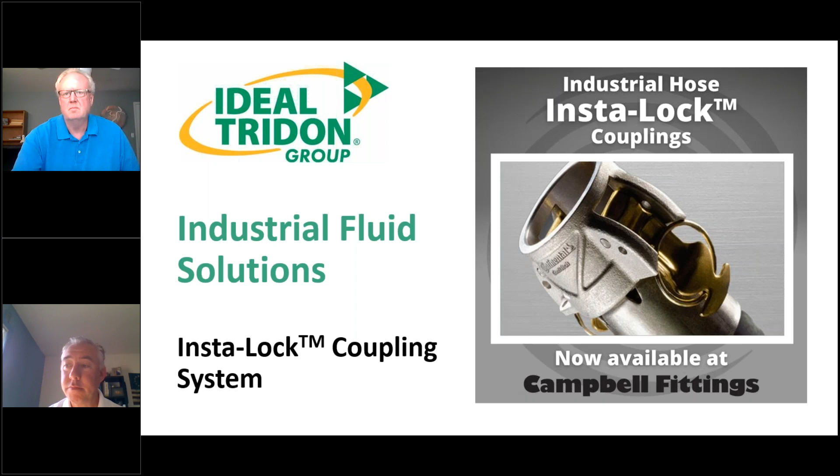We are very excited to continue to push this product out in the marketplace. It is actually an integral part of a hose system. For those of you that might be a little unfamiliar with the terminology of a hose system as opposed to a hose assembly, basically we're talking about parts that are engineered and designed to go together and integrate as part of a system. So a hose assembly simply is 3 parts: fitting or coupling, an attachment, and the hose itself. Campbell Fittings actually controls 2 out of those 3 components, the fitting and coupling, as well as the attachment. The only unknown was the hose, and that's where the crimp specs come into play.

I'm sure many of you, if not all of you on this call, are very familiar with Campbell's Crimpnology and our system of crimping hose in a repeatable fashion. But that is something that we take a lot of pride in, and we'll talk a little bit about those crimp specs and testing as we move forward.

One of the things that we always try to highlight when we're doing some education is we talk about performance as opposed to quality. I think quality is one of those words that's a bit overused, and I think it's easy to just throw it around. Whereas performance actually has quite a bit of weight behind it, because you actually have to prove out that performance. There's a lot of fitting and coupling manufacturers around the world, and I think most of us actually have performance ratings or pressure ratings or whatever you might want to call them. The biggest question becomes, is there anything to back that up?

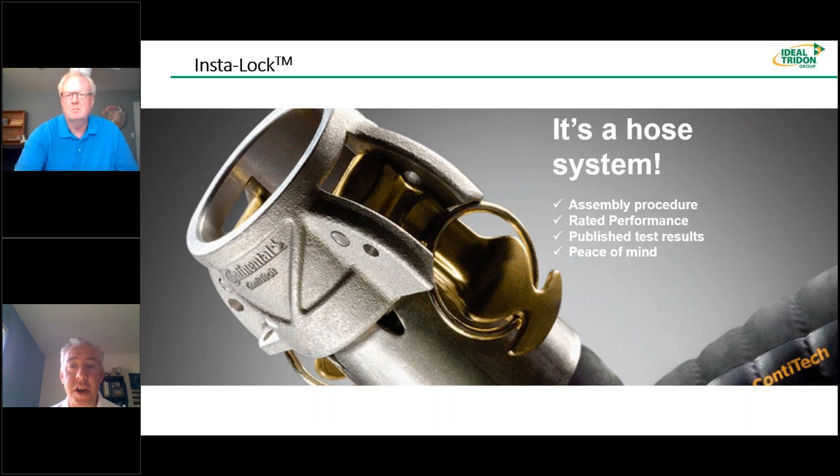So I'm going to introduce Chris Cooper here, who's been with Campbell Fittings for probably close to 10 years now. Chris, I actually didn't even check that one, but seems like it's been 2 or 3 decades from the amount of time we've spent together. Glad to have you with us today. Yeah, it's been over 10 years, and it feels like a couple days.

Not really. Still having fun, right? Yeah, oh yeah, absolutely.

I'm going to talk a little bit about the Insta-Lock and some of the features and the Crimpnology system. Let's start with the system, which is incredibly important. The system we're talking about is the Crimpnology system, the system of proven performance. It has to do with the crimp spec, how you get the crimp spec, and with that crimp spec, you have a rated performance. So it's safe and leak-free, which is what we're all after when putting hoses together.

So there's no more mix and match. Mixing and matching products means taking a fitting from manufacturer A and a ferrule or sleeve from manufacturer B, putting them together, and really one part doesn't know the other part, so you don't know the specifications. Coming up with a crimp spec that gets to a level of performance that's safe and leak-free is very difficult. So, no more mixing and matching.

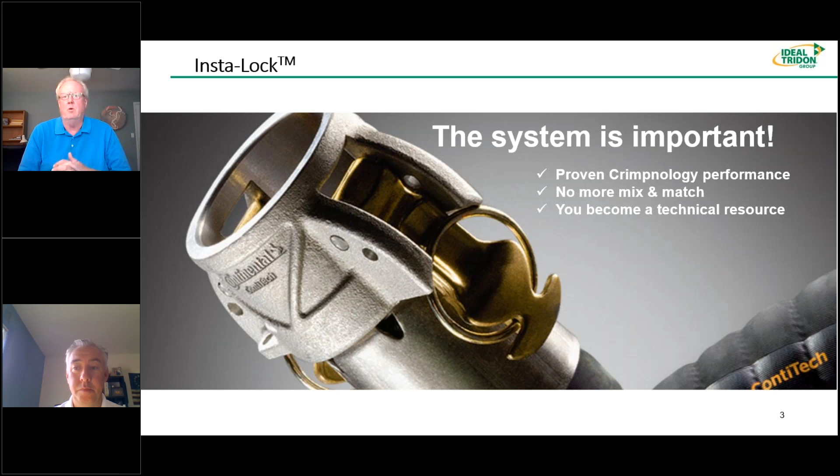You have your ID and OD, but really we're concerned with the hose wall. Why? Well, these industrial hoses are generally hand-built hoses made of layers of material that are wrapped: a tube, then reinforcement, then cover. In the course of manufacturing, the actual hose wall will vary considerably over a 400-foot length on a mandrel, so depending on where you cut it, your hose wall may vary quite a bit. And even though it's perhaps a 2-inch hose, the ID from the manufacturing process could be slightly larger or smaller than exactly 2.0 inches.

So we use the hose wall because we know we want to compress that hose wall between the serrations on the stem and the sleeve or ferrule. Once it's been crimped, we know that compression factor, and then we know the rating. So the procedure is: measure the hose wall, use the chart. It's pretty simple. And then test.

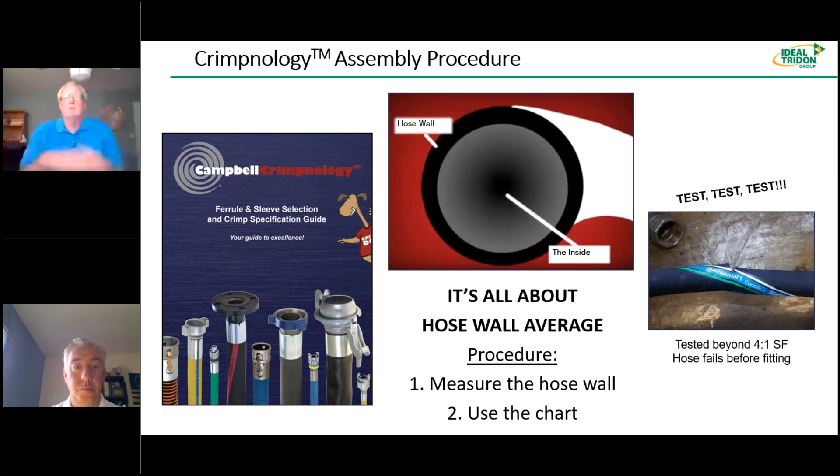All right, I think that's what it says there. I'm getting old, my eyes are going. But anyway, the homework: once you've crimped to that spec, you measure the final OD of the crimp, not on the ridges formed between the dies on the ferrule or sleeve, but on the flat areas.

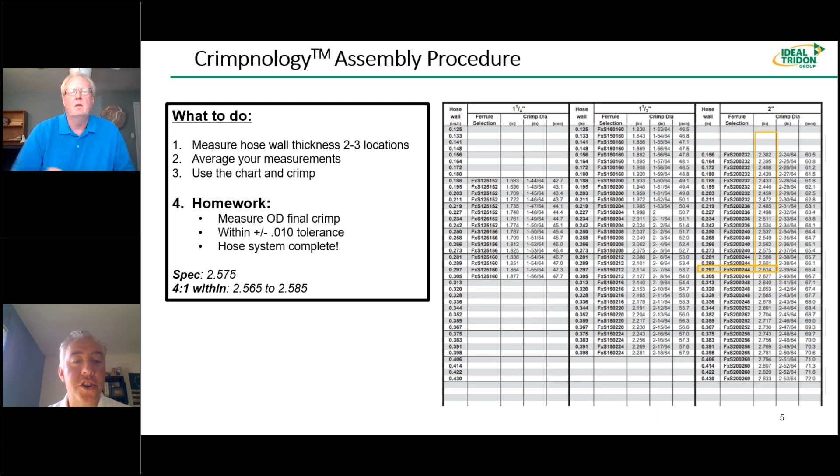Chris, if I could just jump in for a second. Before we do the poll, I think our entire hose industrial distribution world has gone through a lot of changes in the last decade or so. Obviously, we were using a lot of preform clamps to put hose assemblies together. Then there was swaging happening, a little less precise. And finally, we've moved on to the crimp technology, which is much more exacting, as Chris just walked through.

So you had an easier time differentiating yourself when you were crimping hose assemblies and your competitor was just banding them. But now a lot of people are crimping hose assemblies. Not that there's anything wrong with banding, but when you're looking for peace of mind, and something that's going to stay together, a hose system that's going to stand up to performance especially when things go wrong, you do need that crimp for permanent attachment. But based on what Chris just walked through, the specs and the process you use, think about actually using that documentation and that process to sell.

I think a lot of times people forget that the fabrication part of it is truly a science. We've done a lot of the work on the back end, all those calculations and everything like that. But those of you that have either put together hoses or have other people putting hoses together for you on a daily basis, it's not simple. It does take some expertise, and it's easy to learn, but it's also easy to take shortcuts and make mistakes. So that's why you have a process. Think about talking to your customers, especially those critical application ones, about why you have a process, what controls you have in place to follow that process, and really to verify it in the end.

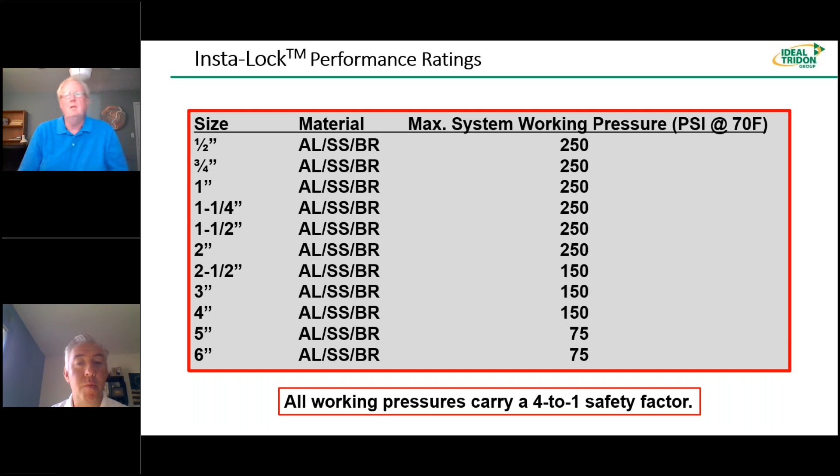Chris, I'm going to jump in one more time, because I think it's worth reiterating, for all the testing that we do and proving out stuff, it is certainly important to realize about that safety factor. One of the critical pieces Chris just mentioned was that the fitting in conjunction with the attachment gives you the pressure rating. A lot of manufacturers out there might just say, well, my 2-inch cam and groove is rated to 250 PSI. Okay, how are you attaching it? There's no mention of that.

So let's be frank. You could use a band clamp, you could use a bolt clamp - well, maybe not a bolt clamp so much for the cam locks - but you could use a sleeve, you could use a ferrule. The reality is each one of those would have a different pressure rating. So you really have to pair the two together in order to get that pressure rating, and that's how we rate everything. Now that we're part of the Ideal Tridon Group and we're actually manufacturing and selling clamps, we do need to be careful on how we assign these pressure ratings. Bands work for specific applications, not necessarily a permanent attachment, but it all depends on what that stamped information is. Do be careful, because not all cam and groove is created equal, and that's basically why we're talking about Insta-Lock here today.

And so let's take a look at the proven performance. And when we say proven performance, what we mean is tested performance. As I mentioned earlier, Campbell tests weekly. We have thousands and thousands of tests on file. Obviously some of them are now older, so we continue to repeat tests as hoses are updated or new sizes come out.

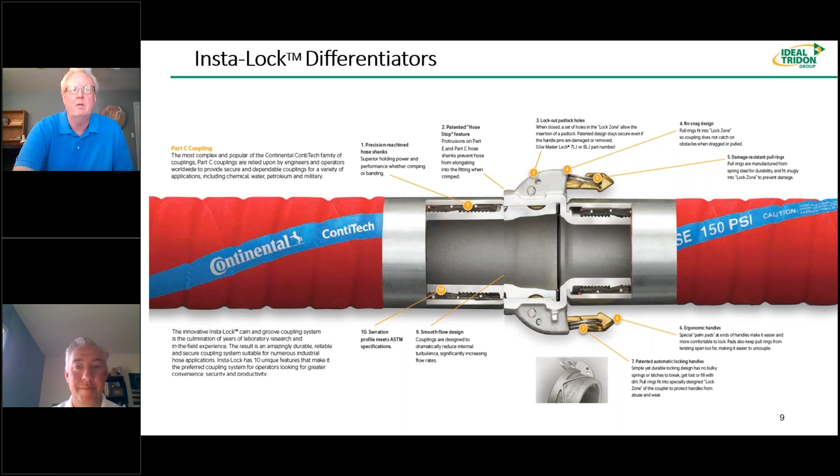You can print it out, you can hand it out to your customers. This really shows the intricacies of the design work that went into this formerly patented product, which is the cat's meow of cam locks. So you'll get this as a thank you after the webinar. Let's take a look at the Insta-Lock features and benefits.

Obviously this is not a C or an E, so there's no shank on this one. We're talking about the head of any of the fittings, any of the couplers. So you have patented automatic locking handles, and that ring is actually a spring. There are no springs in themselves; the ring itself is the spring. As you push down on the handle, it snaps under those casting wings and self-locks.

The damage-resistant coupler design - you can see it's kind of a V in the casting on the sides. What does that do? It reinforces the sides of the cam lock, giving it thicker material in that V area, which helps reduce egging. Egging happens when customers drop these cam locks on the pavement, and over time they egg and no longer connect. That extra V reinforcement on the side was also part of the patent, and that helps eliminate or reduce the egging.

Then there's the dragability factor - you see those little wings. As you're dragging the hose along, those wings stick out further than the handles, so dragging along the ground is not a problem. You don't have anything to catch on that's potentially going to hold up the dragging process. And the ergonomic handle has a depression in it for a nice, easy grab from underneath - if you've ever used it, you'll know what I'm talking about. It's really quite easy to use.

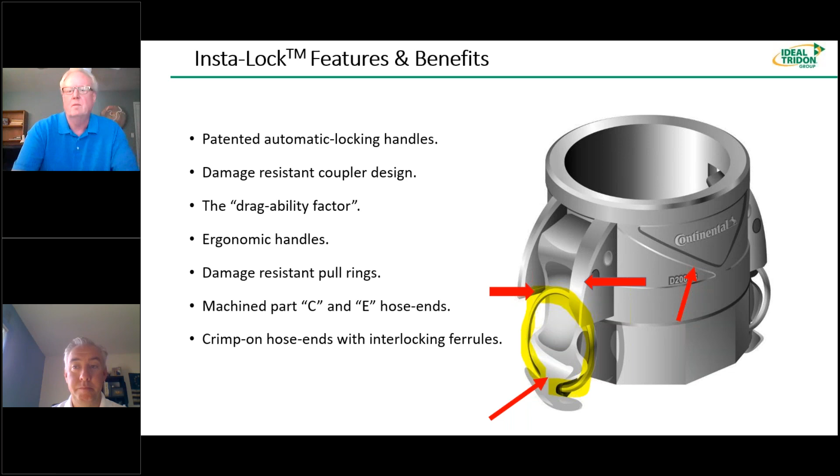So let's take a closer look at the patented locking arms - easy to engage and disengage. If you look at the pictures on the right, the red arrow on the far right picture shows it open - the ring is on top of those cast wings that help with dragability. When you push it down, the ring pops over the edge of those castings and you get locked and engaged - that's the green arrow. The ring is now underneath those cast wings and fully locked.

So it's a very simple design versus the competition, which has detente and little things to pull down, springs, and an extra piece you have to put on the cam lock to engage and lock. No springs, no rods, no cotter pins. It's a very simple, bulletproof design that works extremely well, and it's been out there for years and years, so it's a proven design. We do have repair kits, so you can get new arms - people out there are hitting stuff and banging stuff, and things will break, so you can get repair kits.

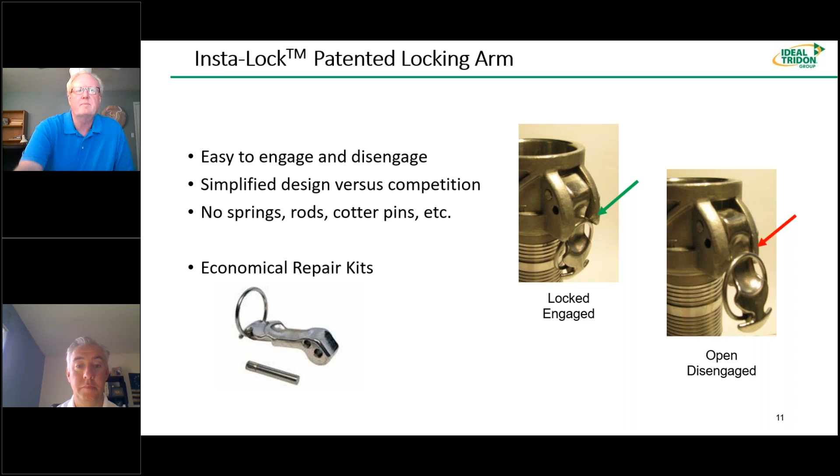Now, the patented hose stop. You'll see that this is a C, and you see the little nub that the arrow is pointing to, and that is for the assembly procedure guys in the shop. When you cut your hose, rather than jam the hose completely up to the head of the C of the fitting itself,

those hose stops stop the hose just short of it. Now, everybody's out there going, okay, cool, but what does that mean? Well, actually what it does is it gives a little bit of separation between the end of the hose and the head of the fitting. So as you crimp, you're compressing the hose wall, and the hose, as it compresses, needs to flow, and it flows both forwards and backwards. So it gives the hose a little space to flow forwards and not put pressure on the head of the fitting. So that's the patented hose stop feature.

And of course, I don't have a picture of the interior of the C&E, but it has a tapered ID, head-to-shank smooth flow design. So rather than have a ledge where the head of the fitting hits the shank, it's actually tapered for more of a full flow design with less turbulence and less restriction. It meets the ASTM and military standards.

And you'll notice the next arrow in the center where it says unique barb design versus competition. The competition shown there in the center is a 2-bump smooth shank with 2 serrations, and that's really for banding only. But the serration design on the shank pictured has a whole bunch of small serrations, which do a tremendous job of sealing and retaining the fitting in the hose. And then it has 2 larger serrations, which really bite in and keep that hose, giving it that extra holding power to get to the performance rating that we stand behind.

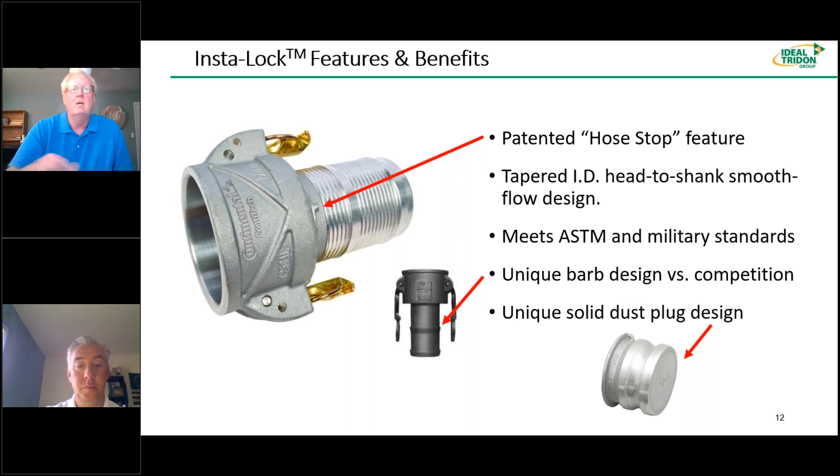And the Insta-Lock also has an added safety benefit, having built into every one of the C's and E's a lockout feature. It takes a standard Master Lock 7LJ, you can see it in the picture. So it goes right through those cast wings and absolutely locks out the ability to unlock the cam lock itself. So that's unique in the industry. We've all seen things out in the field that are very dangerous, so it's nice to have the option here to lock this one out.

So with that, I'll turn it back over to Rob, and he'll take it from here.

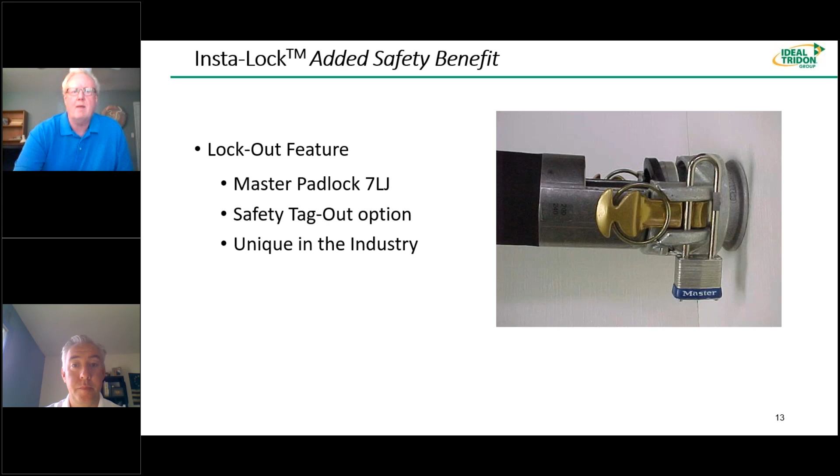One last point on that lockout tagout feature. I don't know how many of you follow OSHA or go on their website to look at accidents or issues in the industrial hose world. But they publish a top 10 list of most common violations that occur in our world every year. And usually around number 5, but always on the list, is that lack of lockout, tag out. So do find those applications because they are out there, usually in the critical stainless steel chemical world, but they're certainly out there. And a lot of people ask, what's this extra hole here for?

So usually every metal is covered here for almost every application other than some of those exotic ones. But I think this should cover the bases for you.

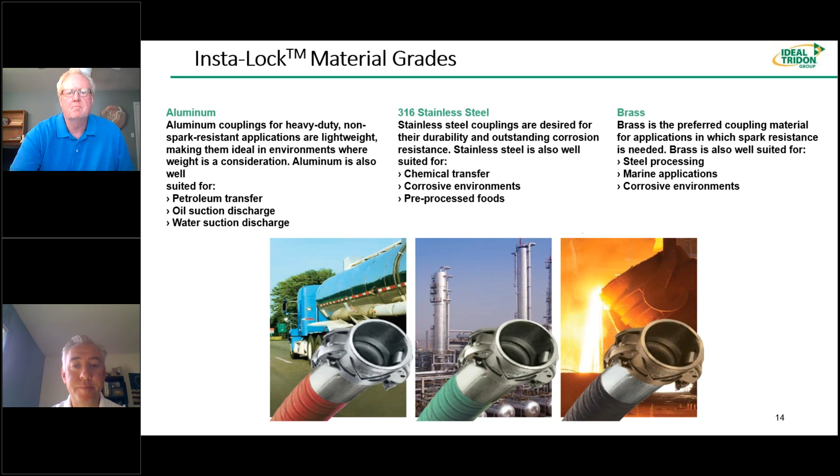Obviously we've partnered with Continental on these couplings for a long time now, and one of the reasons is because they have high performance hoses. I mean, why would you put the Cadillac, or in Chris's words, the cat's meow of Cam and Groove on a substandard hose? Wouldn't that be foolish? I think a lot of people miss the boat on that — like, well, I'm going to go with a high-end hose and the cheapest coupling I can find. But they all work in tandem, so you've got to find the weakest link and address that.

So obviously for high performance hoses, but also for your everyday hoses — your customers don't want a hose that's going to leak, or a coupling that's going to leak as well. So they expect that repeatability, and that's what we're providing you here with.

We also have a lot of parts we didn't really talk about here, jump sizes and spare parts. Some of those spare parts, like the stainless steel handles, come in 316. The ring itself is actually a 600 grade of stainless steel because it needs those hardness properties for the spring. We also have chemical compatibility available to check to make sure your application lines up with the correct metal.

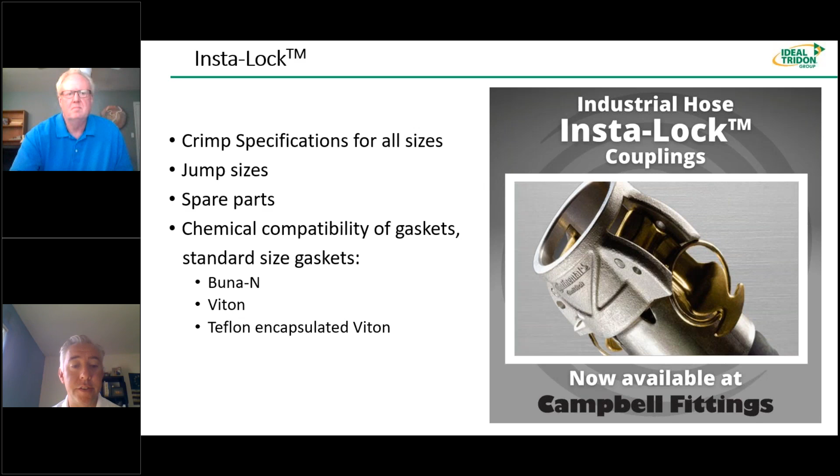You can use these with ferrules and sleeves — it's dependent upon the stamped information on what's the best fit for you. The shank design was created and decided upon between Campbell and Goodyear at the time, to be that hybrid that could be banded or crimped, and that's why you have those two higher bumps. Those bumps also provide a little more holding power for some of those tougher hoses, like chemical transfer ones with plastic hard tubes in there, which can be pretty slick. So retaining into the hose and making sure performance is consistent is critical there.

So we do have all the bases covered on the basic 8.

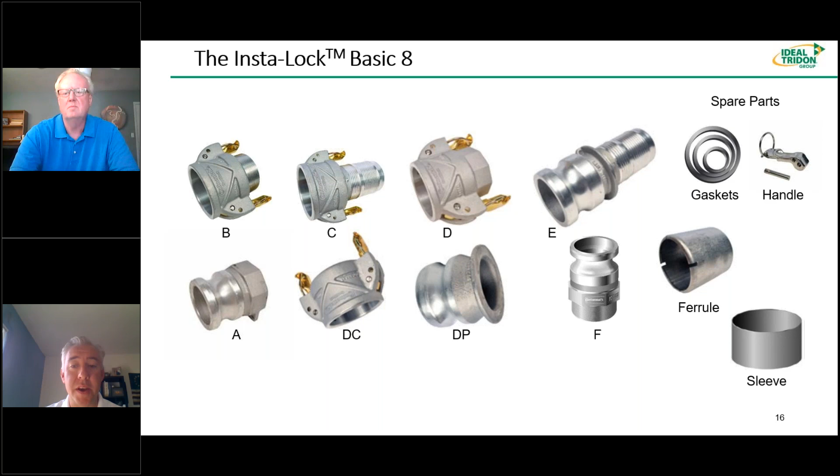Chris mentioned the dust plug a moment ago as well. All these parts are designed to meet the mil spec, which basically means that all cam and groove couplings from half inch all the way to 6 inch must mate to one another. I think most manufacturers' products do that, so it's not like you have to have an Insta-Lock connecting to an Insta-Lock — however, you will get the best performance that way.

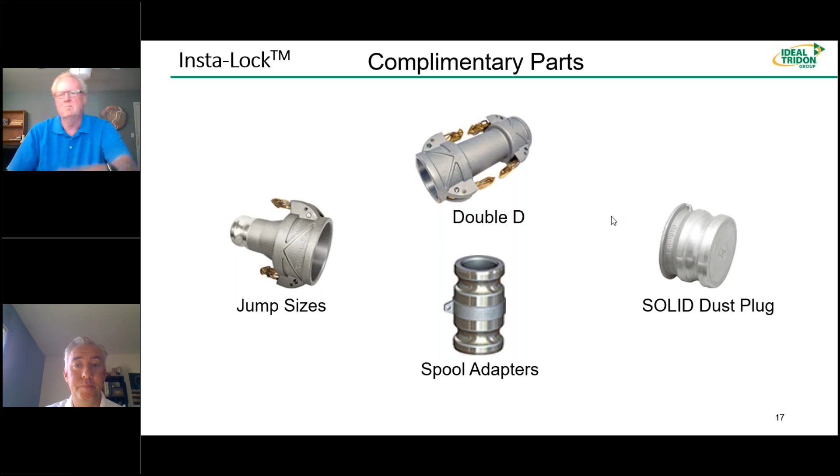So what did we learn? Just a small delay on that one there. That's what happens when Chris is just a few miles away doing that for me. Anyway, just as a bit of a wrap up here, and we'll take any questions that you might have.

A proven hose system, over 2 decades of in-the-field performance, happy customers, repeat customers. I would stretch to find anyone that was not pleased and really blown away by this design.

One of the things I really have to impress upon you is, I understand that price is a major part of every discussion you have with your customers. Once in a while you'll find a customer who says, I don't care what it costs. Usually they say that after they've had an accident and they're willing to pay anything for a better solution to what just failed in the field. However, as salespeople we might fall back and say, I know my customer, they're not going to pay for that. Well, I tell you what, your customer will never buy the Insta-Lock if you never bring it to their attention.

And even worse, what happens when your competition brings them this design and they say to you, hey, you've been my salesperson for industrial hose and couplings for 10 years, and you had access to this and didn't bring it to me? So do yourself a favor, show the technology, let them decide whether they're willing to pay the extra few dollars for this type of coupling, which, as we've shown, will perform under pressure and handle those out-of-control applications, like Chris said, where a hose isn't designed for a specific application. Let's be honest, things go wrong in the field all the time - systems get closed, pressure builds up, hoses burst, fittings eject, or blow apart themselves. So you want to give customers the opportunity to have that option and show them the technology. Even if you think they'll never pay for it, bringing new technologies to them shows you're on the cutting edge and partnering with manufacturers bringing innovative solutions to the marketplace.